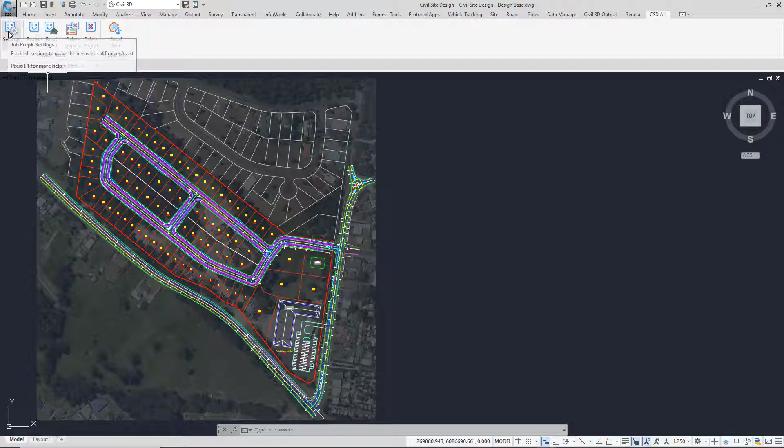The main settings for Project Assist are found in the Settings button on the CSD AI ribbon. The first tab you're offered is Default Templates.

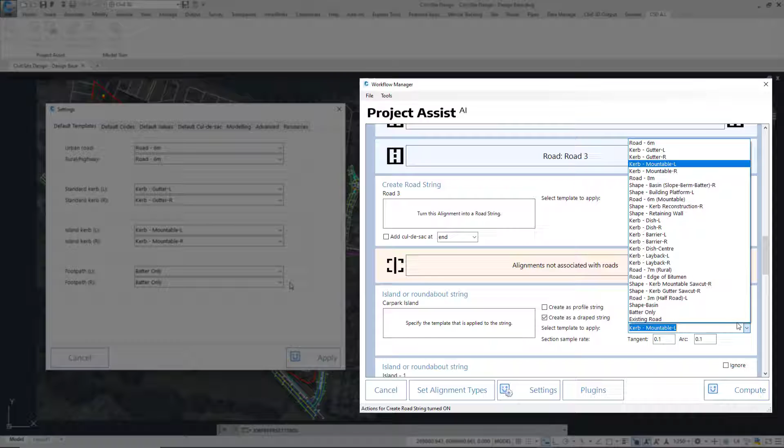When you run Project Assist and open the Workflow Manager, the software will identify the string type and apply an appropriate template from this particular list. As you can see in the Workflow Manager, you're able to go in and override the template being applied, so you can customize it. However, from the list, these are the templates which are applied by default. If you want to change them here, you can do.

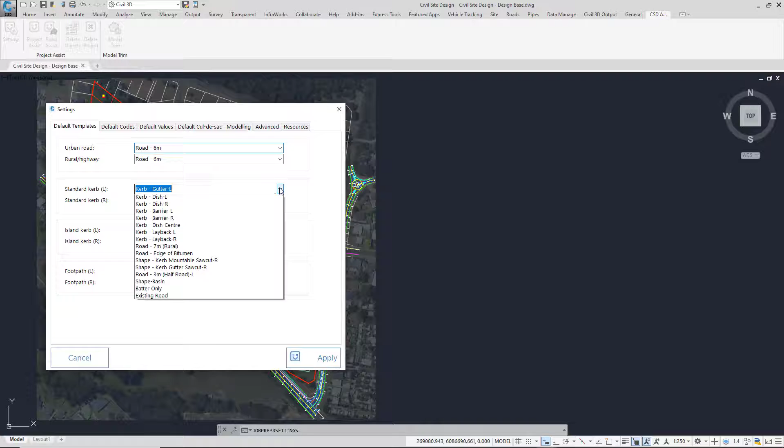They are reading your data folder, so for each project you'll have potentially a different selection of templates. If you find that you are prompted for default templates, this is because the software, when it first opens the project, does not have this particular template being applied, and it wants to know what substitute it should use instead. So you'll need to go in and choose something from your templates list.

When you create civil site design templates, inevitably you'll have a variety of different codes defining different sections. The default codes that Project Assist will look for to help establish how the string and model should be constructed are defined in here. So for example, if you do not use an SAW code to define a saw cut, maybe using just SW instead, then it's important that you go through here and assign the typical codes that you apply for these particular aspects of your templates.

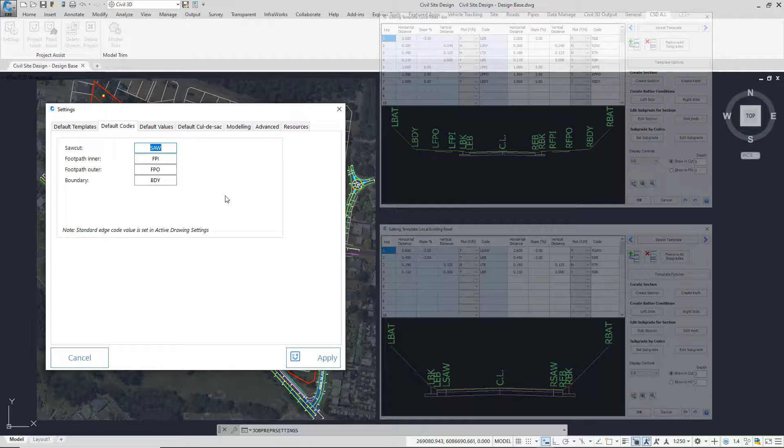You'll notice that the edge code is being set in the active drawing settings - this is the EB code. Some of you may use LIP, for example, and if that's the case, make sure that's set up in the active drawing settings, design settings tab.

So the default values control a number of different aspects of the string creation for Project Assist. Project Assist will review certain strings and offer the opportunity for those to be part of a road widening project or a road resheet project, where it will apply different variations and use associated alignments to control the widening.

The vertical design of that particular string can have a nominal thickness applied, and this is where that value is offered from. At the moment, anytime we're offered a value for a resheet, it will always be 30mm by default, but as you can see, you can go in and change that value.

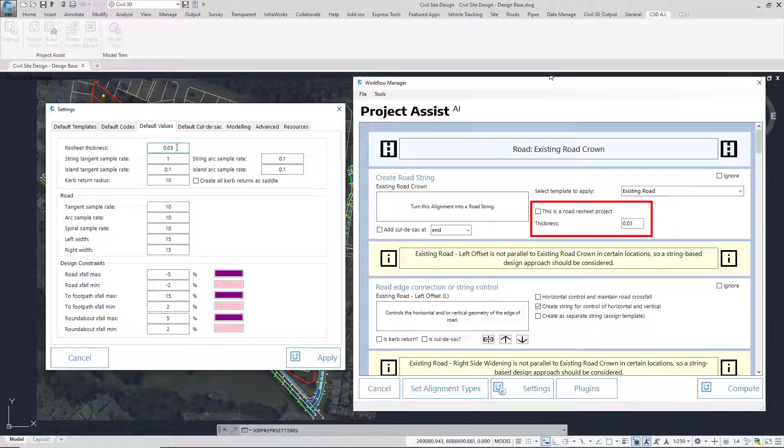The sample rate for strings and islands is offered to you as a default, and again you can go in and change these particular values. So for example, if you're doing some widening or creating a car park, the tangent sample rate and the arc sample rate can be changed by you within the Workflow Manager, but these are the values you'll be offered up front. The same goes for when you're creating islands for the tangents and the arcs.

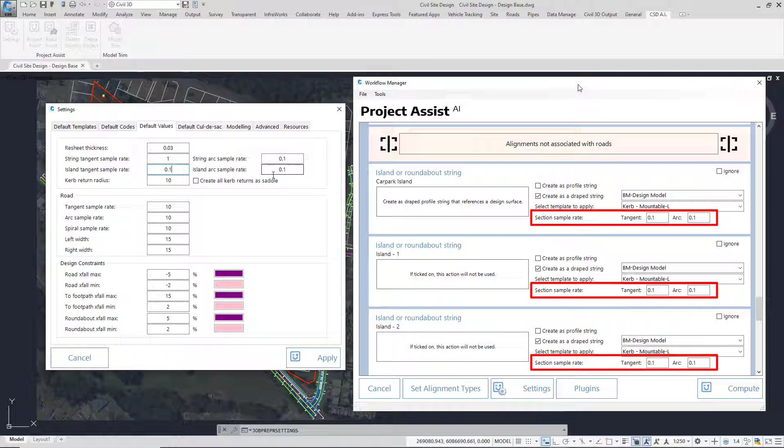A default kerb return radius - this is very similar to what you'd have with auto kerb returns. This is the default radius that will be offered for all kerb returns unless you have created an alignment to define a custom kerb return.

Create all kerb returns as saddle will apply a design variation to the main road where you have an intersection, and move the EB code or whatever edge code you've used to within a millimeter of the center line to basically create a saddle. Again, you can override this in the workflow and customize which intersections have saddles.

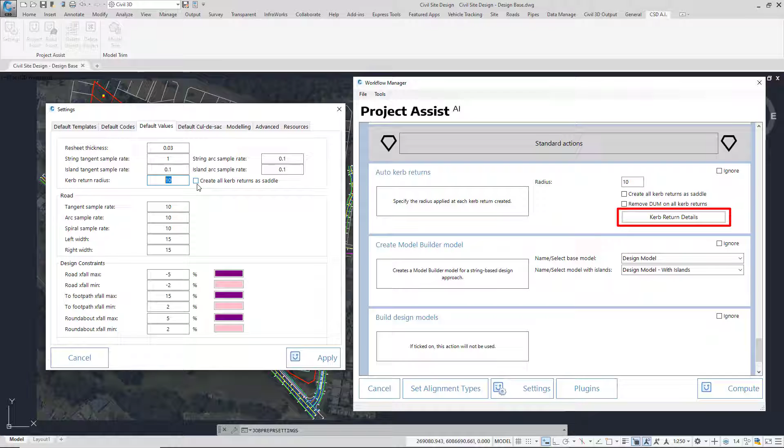The road sample rate is very similar to what you'd have when you create a traditional road or profile string. These values are being assigned, and the search for the sampled surface left and right. When Project Assist reviews strings, it will determine whether or not the sample rate could be increased or even decreased. So these values can only be changed within the settings, not within the Workflow Manager.

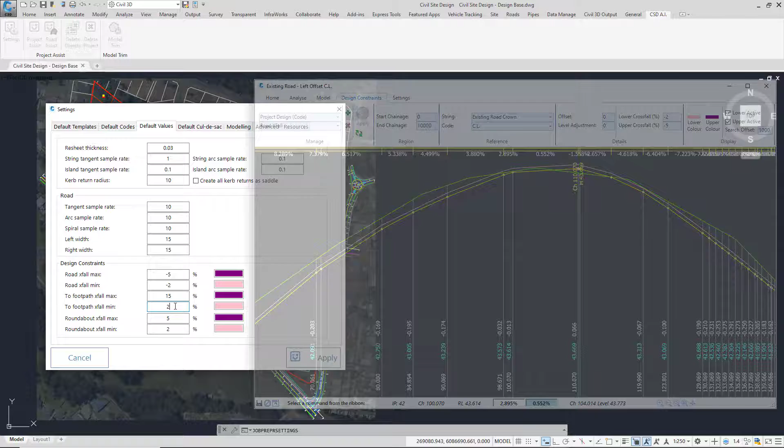When you use string control for different aspects of your particular road, for example, maybe you were using a profile string to control the left edge of bitumen, we will automatically assign some constraints for you with these default values. The same goes if you have a footpath that is independently controlled, again with a separate string, but again assigned to the same template. And the same goes with the roundabout. These constraint values and colors can be changed by you by default.

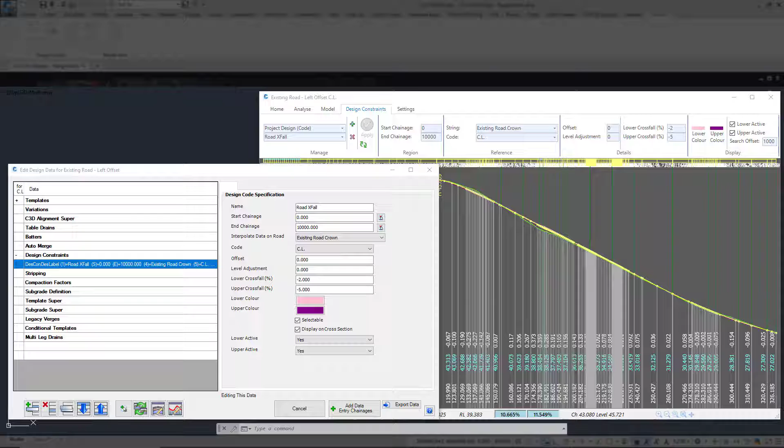It's worth pointing out that the design constraint values can't be changed when you're in the Workflow Manager. So the only way that you can modify the constraint once the string has been created is to go ahead and change it within either the design data form or the vertical grading editor.

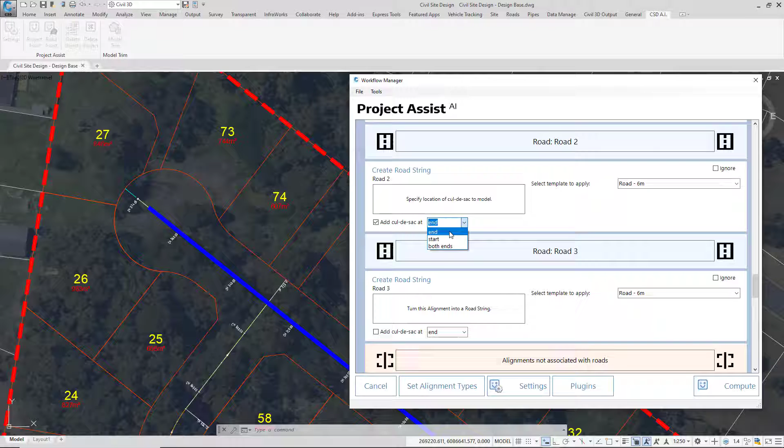When you create any road string within Project Assist, you'll have a checkbox which will confirm whether or not you want to have a cul-de-sac created at the start and or the end of that particular string. By default, we use these particular values. We appreciate that every cul-de-sac could be very different on each project, but by default, we give you these, and that is how the cul-de-sac is created.

Once it's created, you can go in and change the properties of the alignment and the associated string using the cul-de-sac tool found in the network strings pull down.

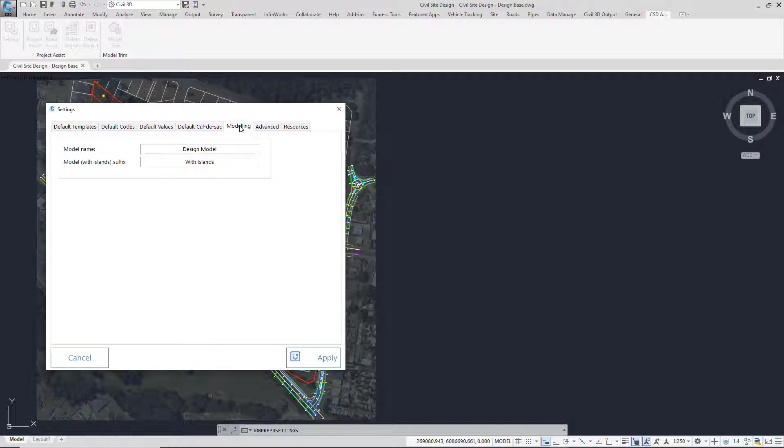Project Assist will use Model Builder to combine the strings together. In the first instance, it will join them together and place them on a model called Design Model. Again, this is the default that you're offered. You can change it at the point of creation in the Workflow Manager.

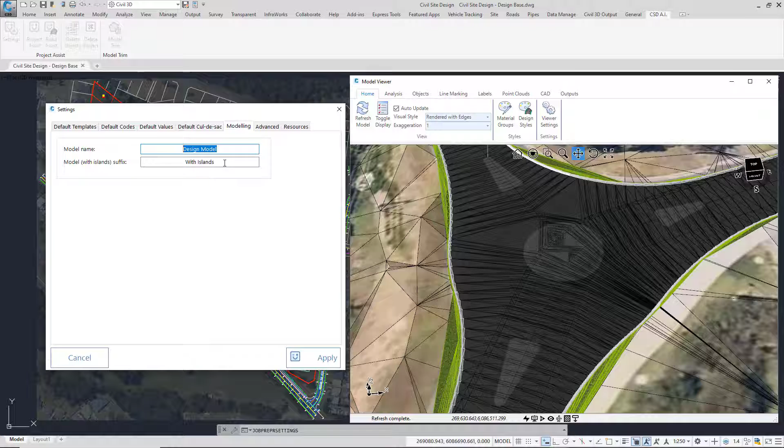Once that is created, any islands that you create with Project Assist will be assigned onto that particular model, or draped onto that particular model with a brand new model, which will have the suffix, as you can see here, with islands. So Project Assist by default will create two model builder models, the second being that which the islands are draped onto. So if any design changes are made to your roads and associated strings, then the islands can be updated.

The Advanced tab has some values which, whilst you are able to go in and override, we would recommend you keep these values as default.

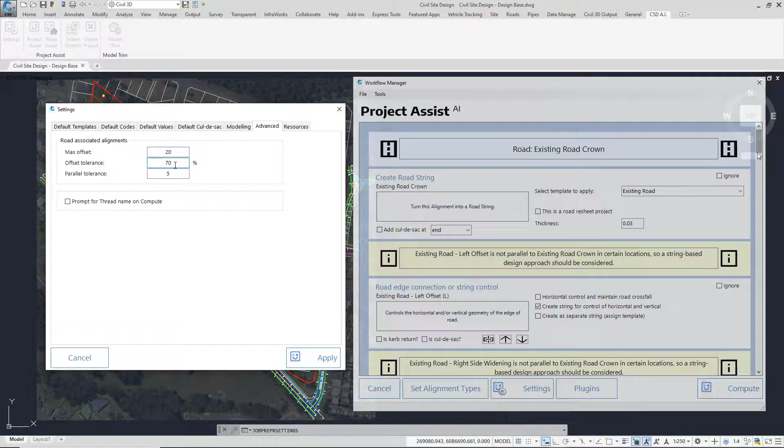The first couple of cells controls how far left and right the software should look from a road string to find associated alignments, and in this case it would be 20 meters. And if it can find 70% of that particular alignment within 20 meters, then it will go ahead and use it. You may be prompted within the Workflow Manager that a particular alignment is not parallel to the main road, and we will offer you some different options as to how to manage that particular alignment.

As you can override the different options and still continue to choose, for example, whether or not an alignment is simply controlling the horizontal position of a code, we'd recommend you just leave this value as it is at 5.

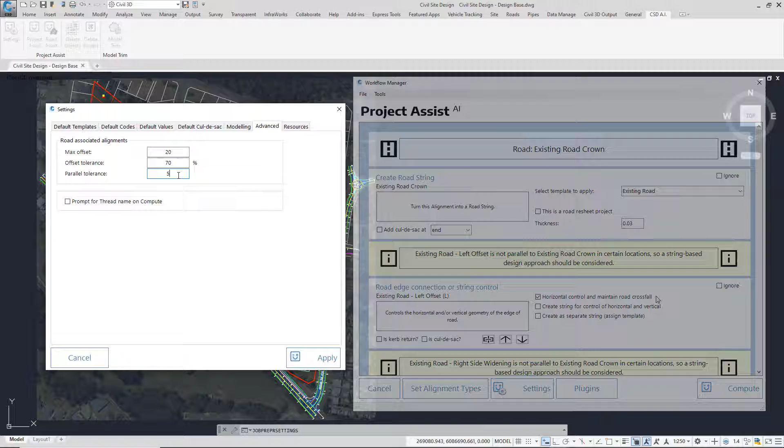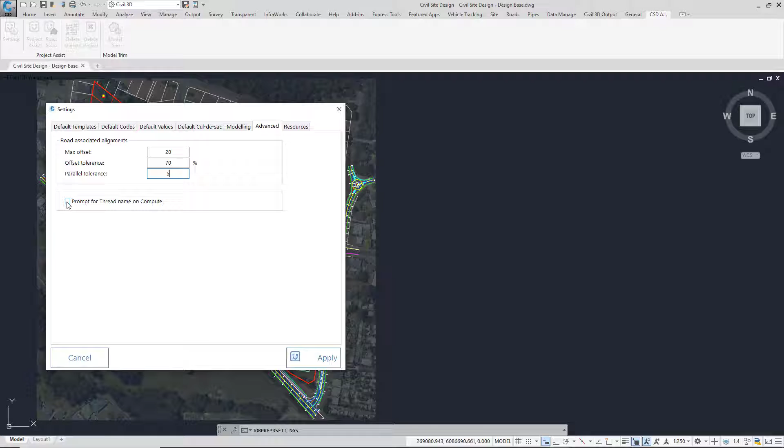When you run Project Assist and compute the workflow, the thread that is created in the background can be provided with a name. At the moment this is found under the Tools pull down. However, you can prompt for a thread name on each occasion. If not, the software will apply a naming convention of its own, so it may be useful to be prompted for a thread name that you can define every time you run Project Assist.

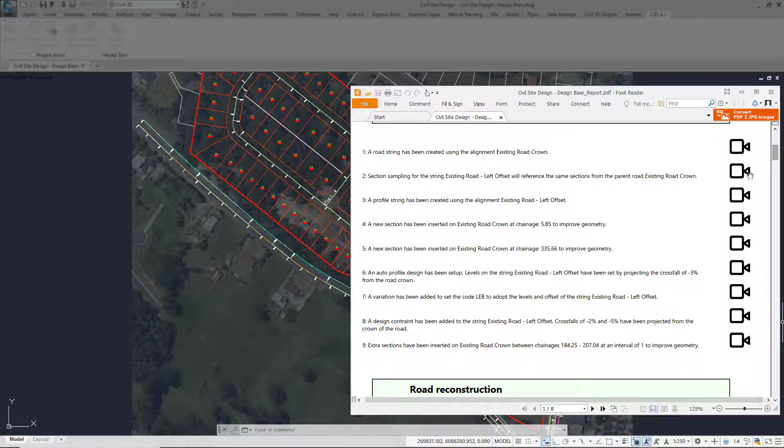Lastly, we have the Resources tab. Every time you run Project Assist, a PDF report is generated to confirm what has taken place to create your strings and model. The report also contains links to videos. These videos are generic, which explain, for example, what a profile string is or what a particular design variation is doing. Those videos are not available on your computer when you've installed Civil Site Design.

You have to download these directly from this button here. You'll be prompted to install an executable from which all of the videos will be unpacked and placed into your common folder.

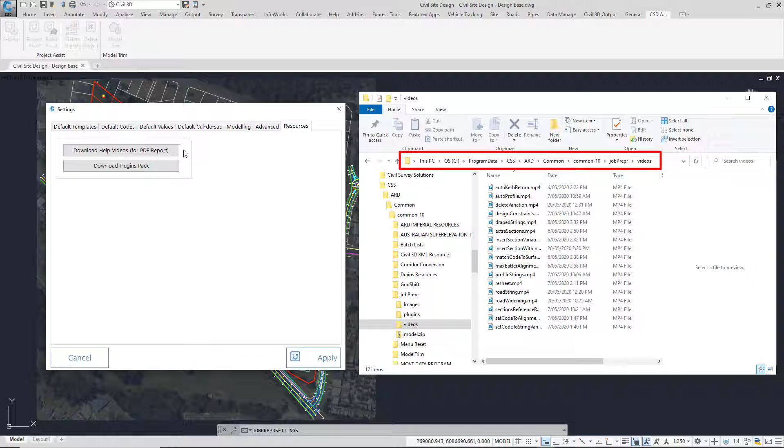The download plugin pack is not currently available. That concludes our summary of the settings for Project Assist.